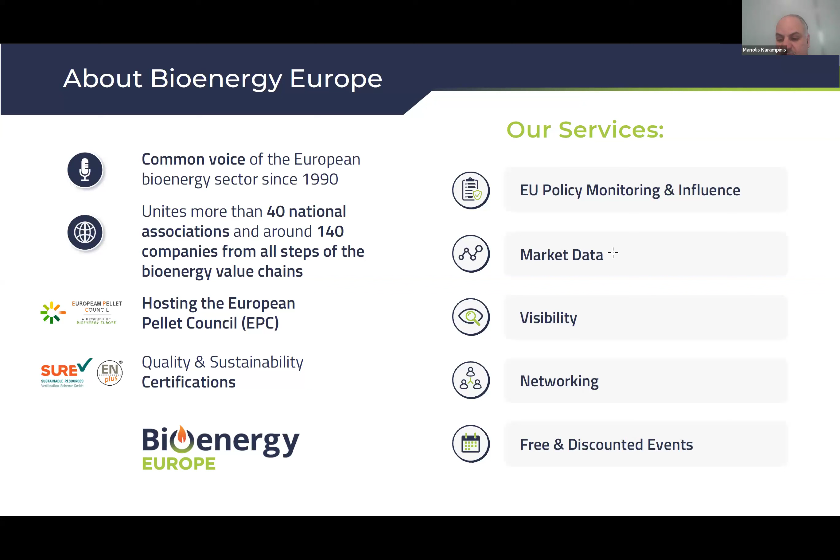And what we are doing is first and foremost EU policy monitoring and influence. We are active in collecting data from the market, but of course, like every association, to promote, make our members more visible and so forth. And what we are usually doing internally in Bioenergy Europe is organize activities within working groups. We have 7 of those. Some, I would say, are a bit more market-oriented or feedstock-oriented, like the pellets and agro-biomass.

Others are more policy-oriented, and the policy topics of priority at the moment are sustainability, the very hot topic of carbon dioxide removals. There is, I think, the 3rd webinar of WBA focusing on that, and also industrial competitiveness, which covers carbon taxes, Net Zero Industry Act, and many other policy files. If you would like to hear more about this, feel free to reach out to me later.

And when time comes, we are also involved sometimes in EU projects that allow us to expand a bit our horizons or knowledge of the sector. And we have been recently involved in 2 projects which are related to the topic of this webinar. RE4Industry, which was about renewable energy utilization in energy-intensive industries, and MUSIC, which was about thermally upgraded biomass feedstocks.

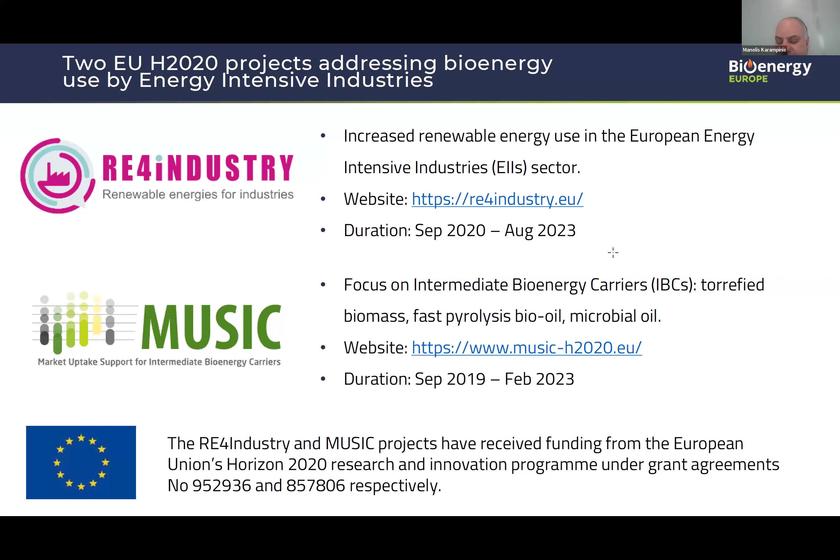I would invite you to look for more information on the project websites, because there is a lot of material over there. For today's presentation, I rely mostly on material we have developed within the RE4Industry project, so I still have to acknowledge it. About bioheat.

Focusing on the EU for the beginning, we know and we usually tell that bioenergy is the largest renewable energy source in Europe, and most of bioenergy is actually consumed in the form of heat. But of course, there is also presence in the electricity generation and the transport sector, but this is beside the point of today's presentation.

And if you look at the bioheat consumption in different sectors in Europe, the residential sector is about half of it. About 20% is derived heat, so district heating, but the industrial sector takes up already today 25% of bioheat consumption. So a big part of biomass is already being used in the industrial sector.

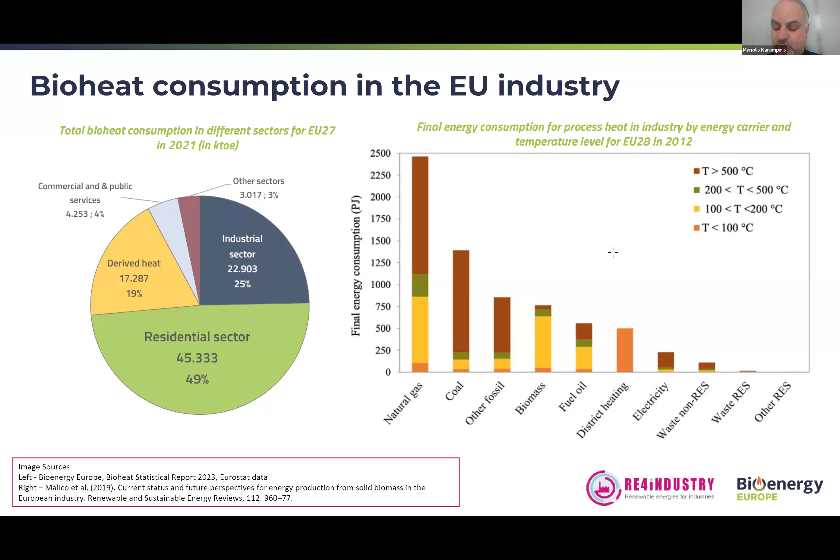When you look now at the temperature levels at which biomass is used and how it compares with other feedstocks, you will notice in the diagram on the right that biomass is mostly used for temperatures between 100 to 200 degrees in industrial applications. It has a presence in higher temperatures, above 200 or above 500 degrees even, but at the moment, not so much compared to natural gas or even coal or other fossil fuels. I would dare say there is a reason for that, and the reason has to do with which industries at the moment are actually using biomass more.

So if you look at how biomass is used within the industries, the ones that are typically using biomass to cover the energy demands are industries with biomass residues or wastes of their own. So the paper, pulp, and printing sector has, of course, their own residues, the wood processing sector the same, and the food sector is similar.

So if you take another approach of looking at the European industrial sector, you can differentiate between 2 segments. One industry segment with access to own biomass residues and wastes, and there, bioenergy already covers 25% of the total energy consumption. And you have another segment which is unrelated to biomass, dealing with minerals, with metals, where biomass at the moment only takes up 2% of their industrial consumption. But that might well change in the future, because that segment is also under pressure to decarbonize.

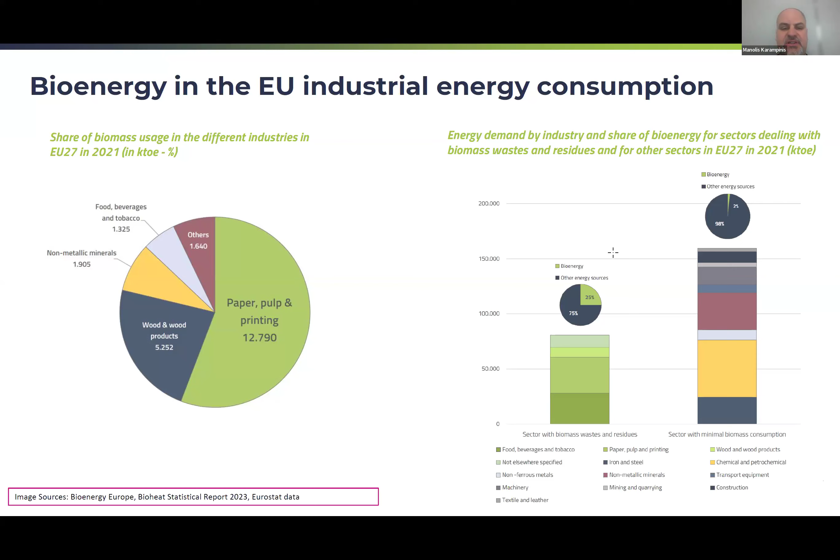For example, because of the calcination of limestone in a kiln. And the process emissions is a major issue, and the reason why I call these hard to abate industries, because you cannot control them by a simple fuel switch. You need other solutions, such as application of carbon capture and storage.

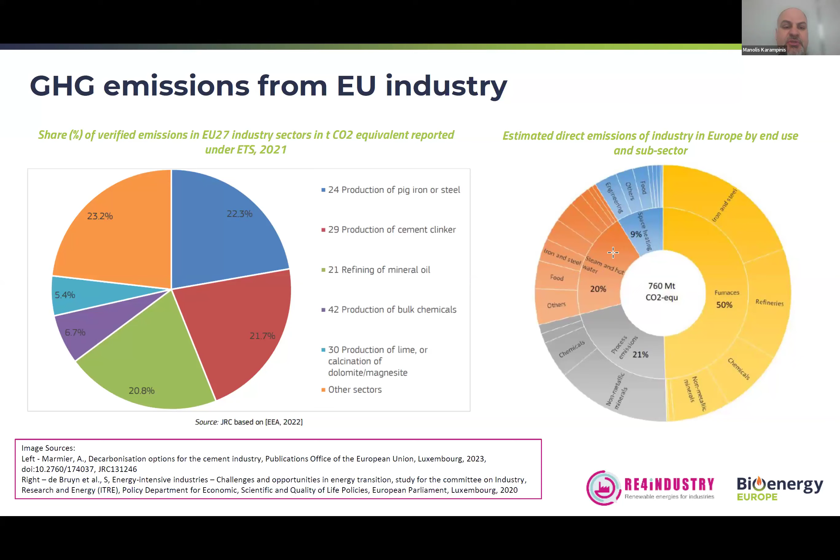That being said, the fuel switch is a major part of the energy transition for those industries. And today I would like to give you some examples of how some of them are looking into biomass utilization. And I will start with the usual suspect, which is the cement industry. Cement industry is a high temperature application. It requires significant energy consumption, around 3.7 gigajoules per ton of clinker produced, and it reaches temperatures about 1,500 degrees.

If you take note of the European cement production, which is 183 million tons in 2022, and multiply this by the energy demand, you can take a guess of how much energy you need for cement production. As noted before, 60 to 65% of the emissions in cement manufacturing are unavoidable process emissions, but the remaining is mostly fuel related. A small part is electricity driven.

So for the cement plant, switching to a carbon neutral fuel is a major step on the road to carbon neutrality. And already today, we have individual cement plants which go almost to 100% thermal substitution by alternative fuels. What is relevant to note is that these plants typically use low or negative value biomass feedstocks. So things like animal meal, sewage sludge, waste wood, green waste, and pretty much everything with a biogenic carbon content that someone wants to discard, and instead of ending up in the landfill, would go into a cement kiln.

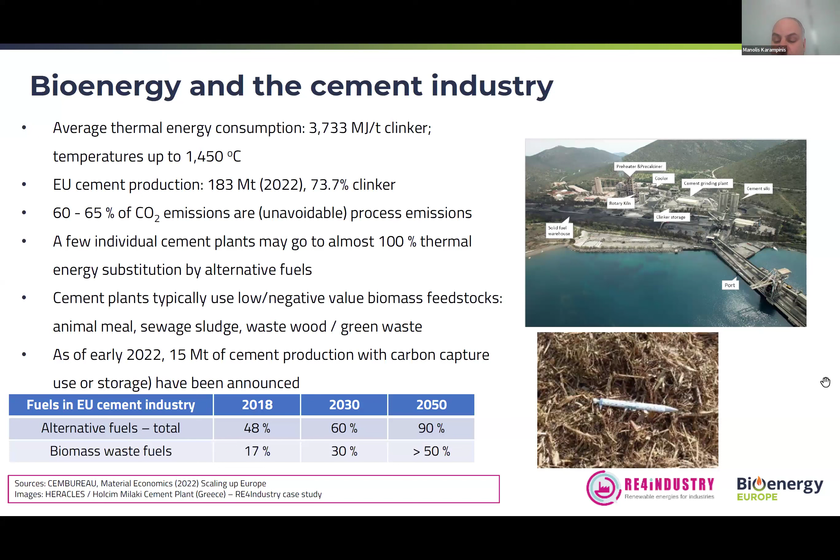If you look at the roadmap of the industry, by 2050, the European Cement Association estimates that 90% of the fuels used in the cement kilns in the EU are going to be alternative, of which more than 50% is going to be biomass. The pictures I have here are from a cement plant in my native country, in Greece, which is using already now and starting to use more and more green waste coming from public parks, from urban tree management, as a substitute for fossil coal.

A very interesting sector for the bioenergy world is lime. Lime has also high temperature levels, a bit higher energy consumption. If you look at the total EU lime production, it's not the same level as cement, of course, but it's a very relevant material used in many different applications. Noticeably different between lime and cement is the size of the industry. In cement, we're talking about fairly big plants. In the lime sector, we have multiple smaller lime kilns in almost all EU countries, and most of them, I would say, are small-sized companies with some exceptions. This has some implications when it comes to considering, for example, bioenergy supply chains.

Again, we have the unavoidable process emission component, which requires that the lime industry employs CCS solutions in the long run, but the fuel switch is already part of their strategy. In September or October last year, the European Lime Association published a pathway to a negative emission sector by 2050. Fuel switching is mentioned. And if you look at the graphs, biomass is already expected to be 1/3 of the fuel mixture in the lime kilns in Europe by 2030, and it will retain this percentage all the way to 2050.

So in total, we estimate that perhaps the biomass demand that could come from the lime industry is around 2 million tons, and already now there are lime kilns even at 100%, but usually these are located in the southern European countries, smaller and using locally available biomass resources.

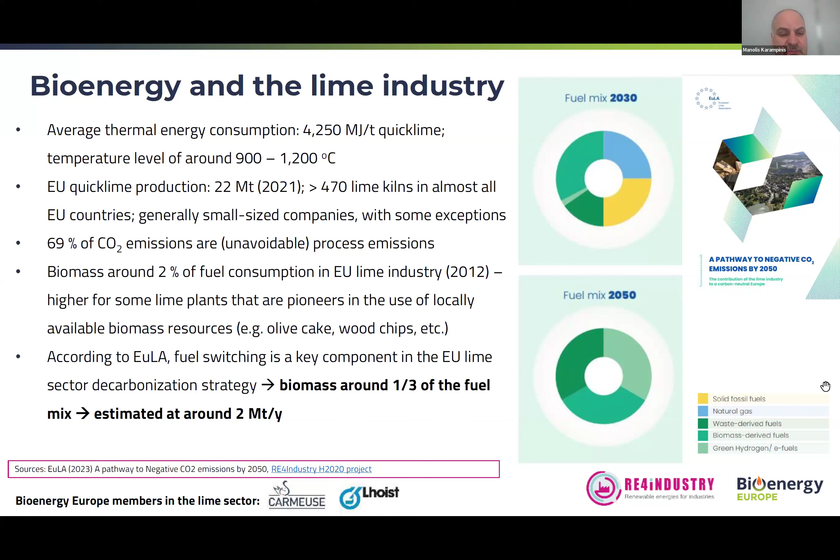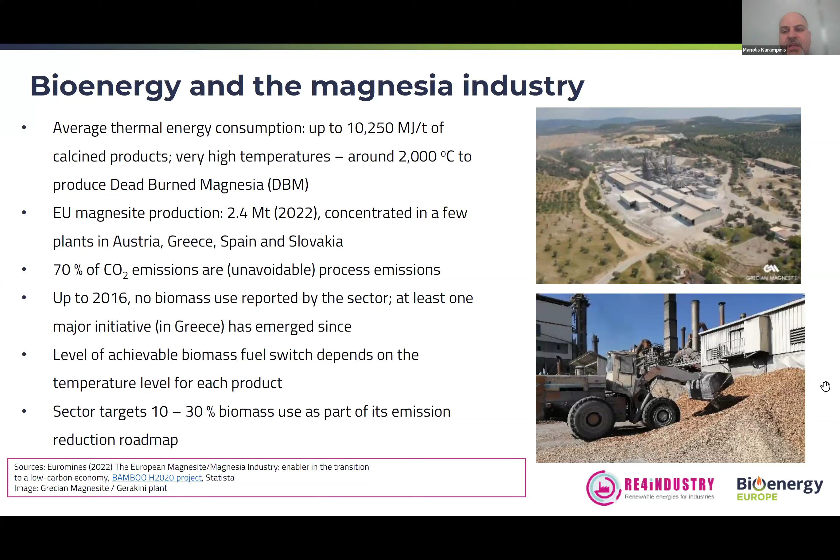In any case, the sector as a whole targets 10 to 30% biomass use as part of its emission reduction roadmap for the future. Steel is another very interesting case, but already here we're steering away from the pure temperature applications and more into metallurgy and chemistry.

The steel sector is using fossil carbon as a reductant, about 58 million tons estimated in 2021 in Europe, and secondary, I would say, as a heat source. The steel industry has two main production pathways: the blast furnace, the more traditional one and a more polluting one, and the direct iron reduction with lower demand for fossil carbon.

The long game, I would say, in the European steel industry seems to be a switch from blast furnaces to DRI production methods. But until we get there, there are going to be blast furnaces in operation for sure, and we are already looking into projects that aim to substitute fossil carbon by thermally processed biomass. The principle works. We know that it takes place, for example, in smaller furnaces in Brazil, where charcoal is replacing coke even up to 100%. But this is easier to do due to mechanical properties.

In the bigger blast furnaces of Europe, at the moment, we are talking more about biochar or torrefied biomass, which is substituting what we call the pulverized coal injection. Not going into all the technical details, by 2050, we could have a demand of 10 to 17 million tons of biocoal, which goes to an impressive 60 to 90 million tons of biomass. And it's also relevant to note that we have other metallurgical industries, for example, manganese alloys, which are also looking into thermally processed biomass fractions as a replacement of fossil carbon in their own processes.

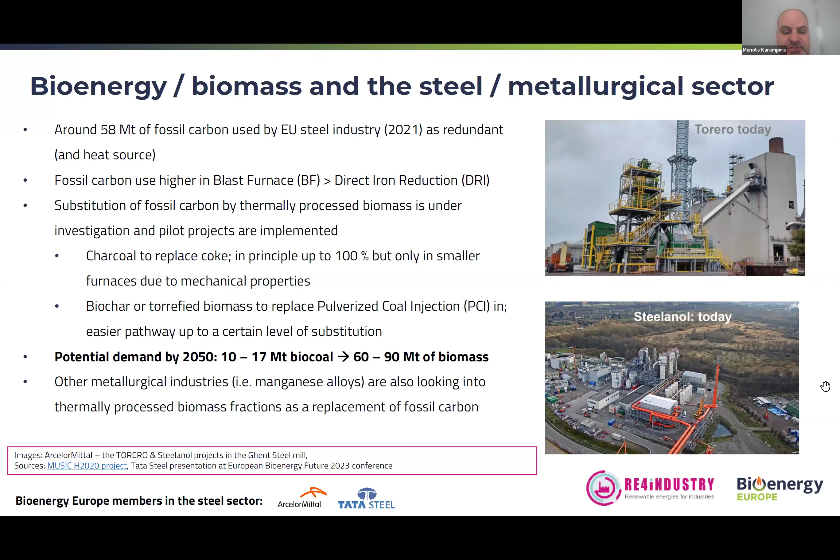A few words about the chemical industry. There are two ways in which biomass could be used there. Perhaps this will be discussed later on. One is the standard method of producing steam from biomass. This is a well-known and proven technology. Whenever you have steam demand, you can do it with biomass. So I would say this is a low-hanging fruit and already taking place. We have examples of soda ash production using biomass instead of coal.

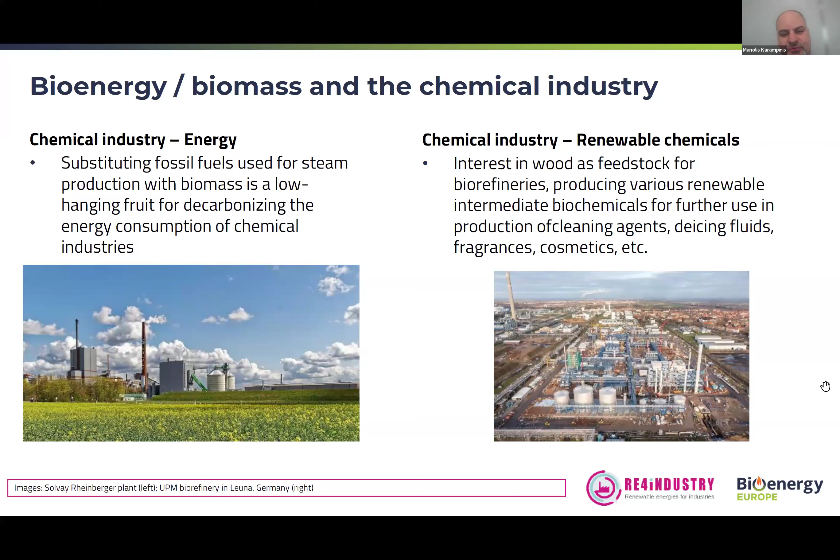But the other pathway is a bit more elaborate, which is using biomass as a feedstock for carbon. And there you can have different types of intermediate products like cleaning agents, de-icing fluid, and so forth, but it's a bit more complex pathway.

Not taking up too much time, some outlook. I didn't discuss scenarios in this presentation, but I would say most of them agree that biomass and bioenergy would have an increasing role in the global, even the European, energy demand in the future, with an increasing emphasis in hard-to-abate sectors, which includes industrial heat. I should emphasize that biomass and bioenergy is usually not the only option for the defossilization of the industrial heat demand, but other energy carriers, other solutions like green hydrogen, electrification, and CCS or CCU are also expected to play a role.

Bioenergy is well established in the wood and the food processing sector, so the sectors that already have access to biomass resources. It is currently used in small volumes in other sectors, but I would dare say it leads the race in maturity and cost effectiveness because it is already there, it exists, and it can work cheaper than other solutions at the moment. In the long run, it will be employed in applications where it provides a competitive advantage over the other solutions for the industries, because at the end of the day, industries also want to make money.

And when it comes to the prospects for industrial bioheat, I would say they depend on several parameters. One, for example, is the market development. You have to consider the price of fossil fuels and the EU ETS price, so the carbon prices compared to biomass. But you also have to consider the specificities of each industrial site, things from space limitations, access to local biomass resources, access to logistics infrastructures, and sourcing options.

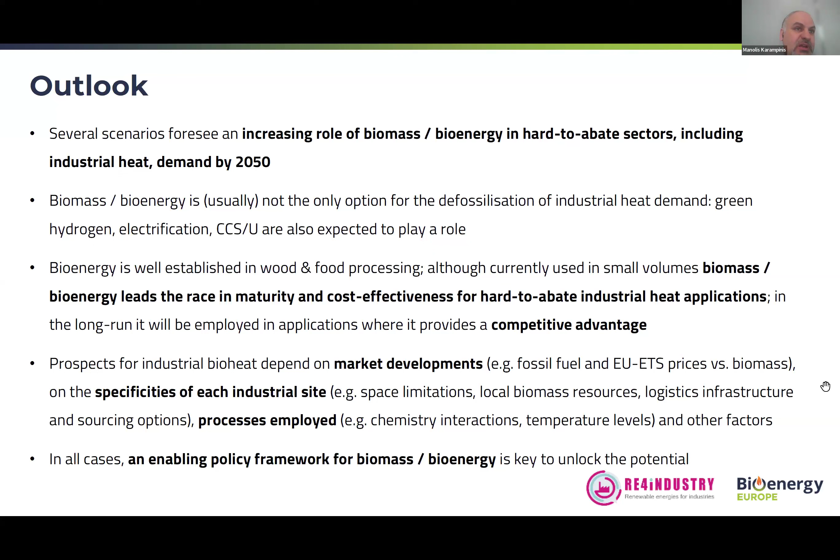And of course, you have to consider the process that you employ in your industrial process, whether you need simple steam or whether you need something more elaborate that requires that you pre-process your biomass to a certain quality or characteristics level. And in all cases, and this is the role of Bioenergy Europe at the end of the day, you do need an enabling policy framework for biomass and bioenergy to unlock its potential. You need clear rules on biomass sustainability, but also on how you can use it in an industrial setting.

Okay, you see that okay? No, we now see the view of the speaker. So we see your view, but not the presentation mode. No problem, I will swap that over. There you go. That's fine.

Okay. Thanks, Christian, and thanks, Manolis, for a great introduction there and a good overview of some of the sectors where we are certainly seeing demand for biomass that we produce in the form of wood pellets. So my name is Justin Tait. I'm our Director for Responsible Sourcing at Enviva. And as was already said, Enviva is the largest producer of wood pellets globally.

Part of my role is to work with our market development team and to support them and work with customers and potential customers and markets on understanding what we do as a business in terms of sustainable responsible sourcing. But that also means I get involved in discussions with some of these new use cases, and hence why I'm here today. My colleague Jens Wolford is also very heavily involved in this area, but he's in Copenhagen this week, so I'm going to take us through this presentation. So just give me a second.

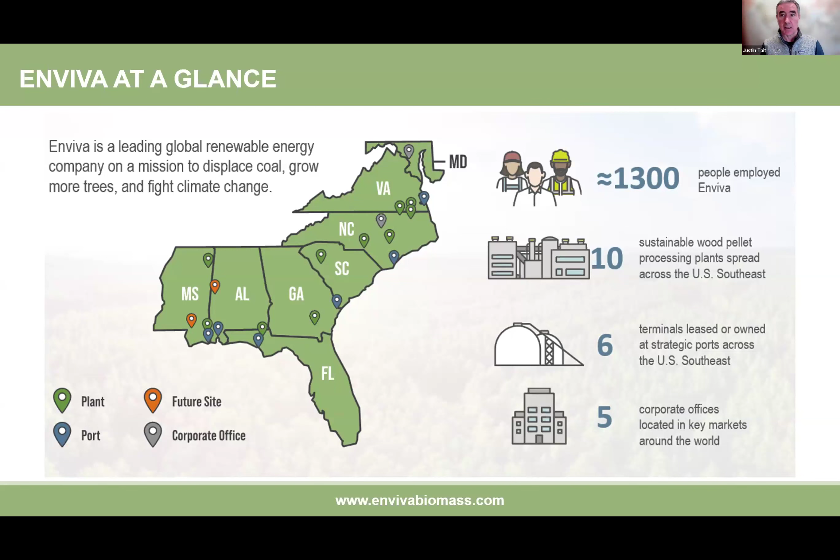Okay, so Enviva, as I say, is a producer of wood pellets. We have 10 production plants in the Southeast US, shipping out of 6 terminals, predominantly into Europe, the UK, and Japan for our customer base. So Manolis is focused as Bioenergy Europe in Europe, but we as a business are much more globally focused. We have a nameplate capacity to produce around 6.8 million tons of woody biomass in the form of wood pellets. We have offices in the US, but also here in the UK, and in Berlin and in Tokyo.

I probably don't need to say this, but I think we all know that the IPCC and the IEA and many others recognize bioenergy and biomass within that as key to cutting emissions, reducing our reliance on fossil fuels, and addressing some of the harder to abate sectors, including with BECCS, which is clearly a focus for some of the traditional power generators right now: how they develop bioenergy with carbon capture and storage.

This is what we're talking about, the humble little wood pellet here on the left-hand side. Manolis has already touched on some of these sectors on the right-hand side where we see future uses for biomass, and we'll cover a few of those where we're already involved in a moment. But you can see the characteristics of a wood pellet make it suitable for quite a big range of potential applications, given the right technologies, logistics, and support mechanisms. And some of those can be a challenge for actually taking some of these potential uses to realization, and I'll touch on some of those as we go through.

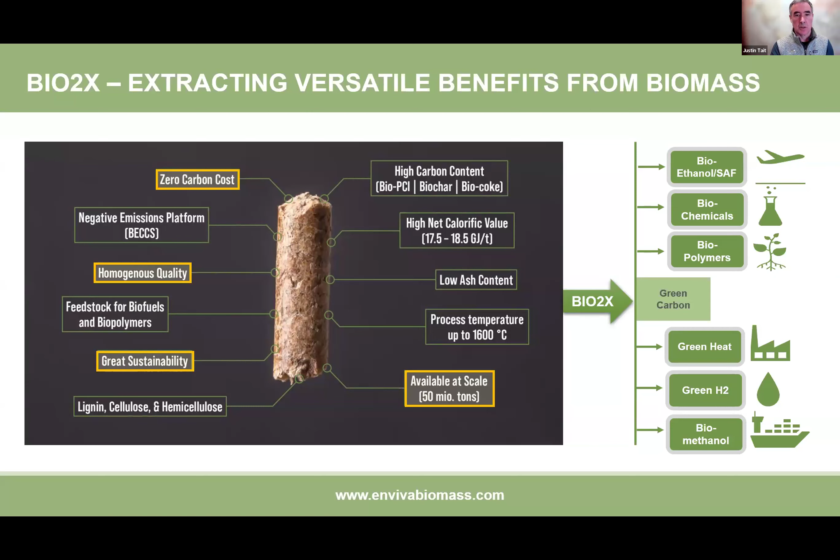So I think Christian said at the beginning that what we get from bioenergy and biomass is the ability to produce heat or power as a renewable fuel, even when there isn't sufficient sunshine or wind for solar and wind power. I mentioned at the beginning, we traditionally focused on replacing coal, so that's really in power stations for power generation and heat and CHPs, where we know there's a proven case to use biomass and an ability to reduce GHG emissions significantly, 85% compared to coal, 70% compared to gas.

Most of our existing customer base has gone through that journey, either converting an existing power station, which is a fairly efficient thing to do, or in the case of Japan, where they've invested heavily in building new plants to replace nuclear power and making bioenergy and the use of biomass a significant part of their portfolio. So as we move across this graphic to the right-hand side is where we see the discussion and the potential for harder to abate industries that Manolis was talking about, to reduce the reliance on fossil fuel within those value chains, and for woody biomass to become a serious part of a wider bioeconomy.

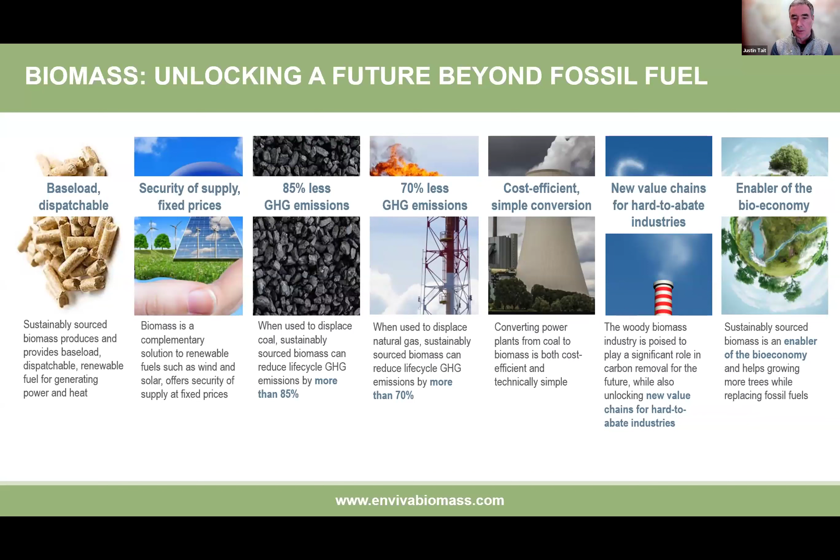And some of those areas where we have had conversations with potential off-takers for biomass feedstock include the process heat, certainly for lime and cement, and Manolis mentioned a couple of those examples. We have existing contracts and supplies into Europe for some of those applications that began last year.

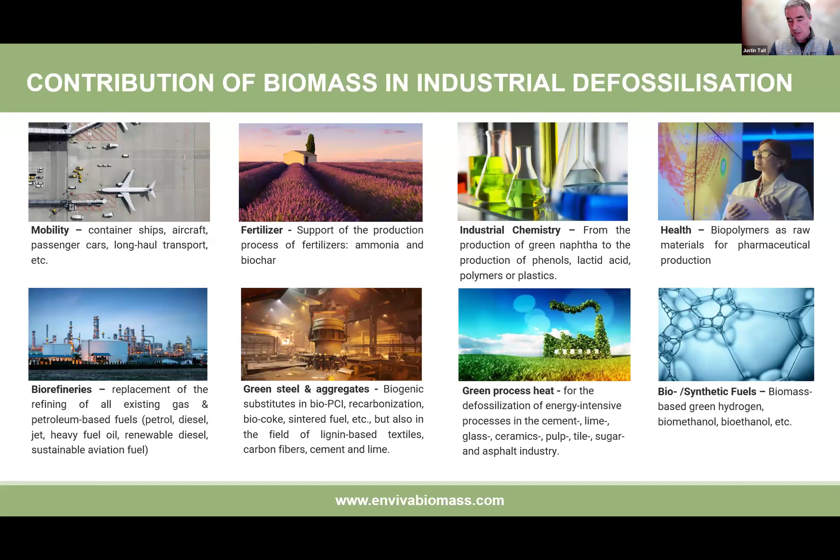We have lots of conversations around the steel space, some challenges there, technology challenges about getting the right kind of heat out of the pellet, and whether torrefaction is a route to do that. But there's also lots of other industry and chemical applications, and we'll come on to some of those for refining into green crude and green crude into things like SAF and to marine fuel.

I think the closest term ones that we're working on and we already supply into and have set up contracts with are lime producers. And I think those are good and working, but I think there are some challenges around logistics. If we think about our traditional logistics, they're huge, they're big volumes into ports, into a single site power station. And once you have that infrastructure set up, it works, it's fairly easy to manage.

I think with some of these newer applications, particularly lime, we have smaller plants, more plants spread out across a greater geography. So the logistics for wood pellets need to be established as getting smaller volumes into smaller plants and smaller uses. So that creates some challenges for us, but definitely doable and something that we already do.

Steel, I think, again, transportation does become an issue there, but also it's thinking about what's the material use. Does it need to be torrefied? How do we do that at scale? We don't do that ourselves at the moment. Lots of people have asked, are we thinking about doing that? But the answer is right now we're focused on what we produce right now, which is a white wood pellet. But there's plenty of opportunity there, I think.

A really interesting one, of course, is the SAF space. Lots of potential feedstocks and feedstocks already in use for SAF, but woody biomass is one that we have had many conversations about and signed initial offtakes for. We don't have supply chains operating right now into that space, but agreements to do so if the refining capacities are built. It's potentially a massive market.

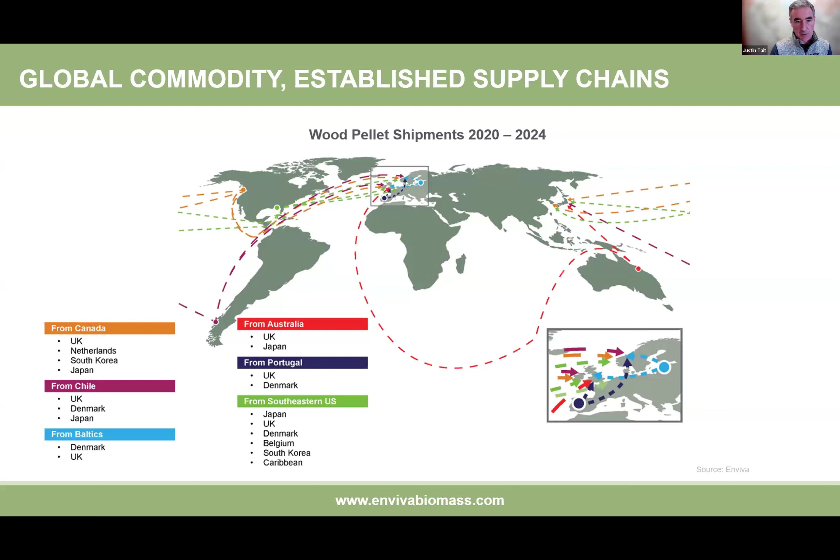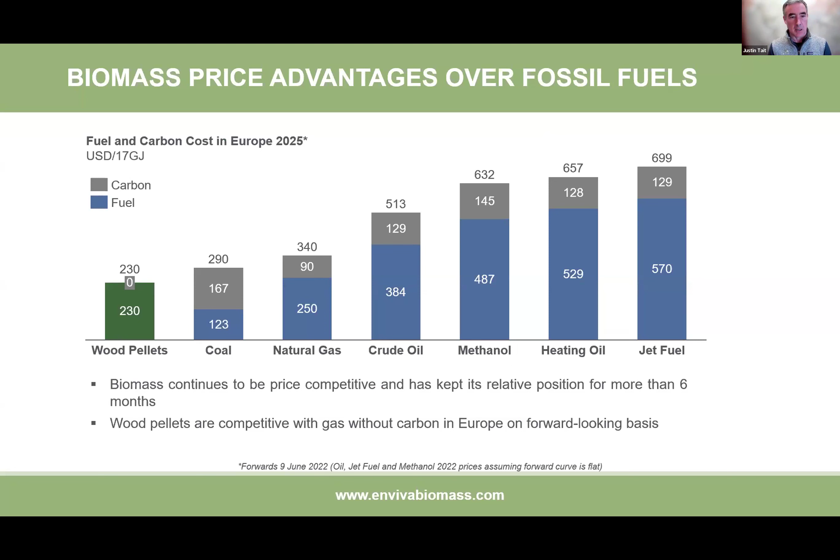The only other slide I had in here, we haven't really touched on pricing, but we did some work last year to think about the competitiveness of wood pellets specifically versus other fossil fuels when you take into account carbon pricing and projections on carbon pricing. Of course, for those customers in the lime industry or cement or steel, that's exactly what they're doing. They're thinking about where their costs are going to be related to carbon, and fossil fuel prices are an important part of the equation for the case to move to a bioenergy or biomass source. And the carbon element of that is clearly very important. So, any questions?

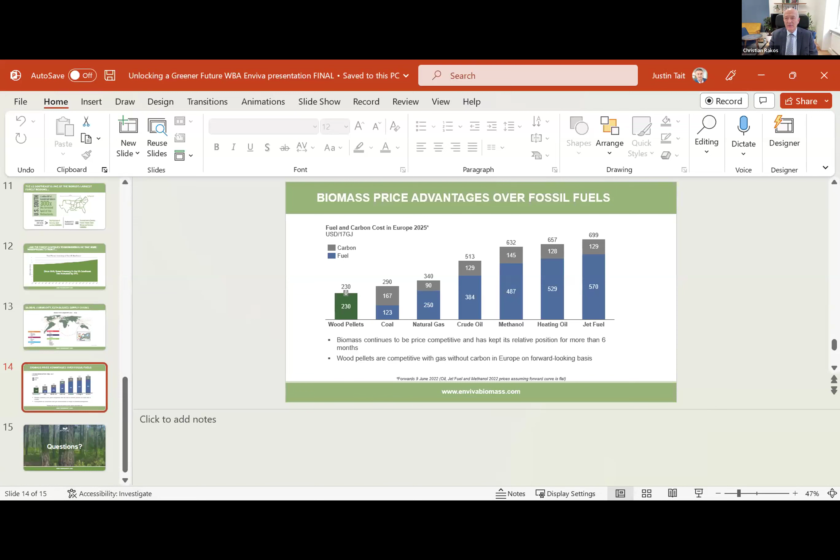Thanks a lot. I think we'll collect the presentations and have the questions at the end. So I would like to ask Thomas Schmidt now to share his views. Thomas has been very much into using biomass in smaller scale industries than you have been talking about, Justin. So Thomas, give us your experiences with renewable process heat using biomass, please.

Yeah, thank you, Christian, and warm greetings from Bavaria in the southern part of Germany. I want to show you some of our projects in smaller scale businesses, businesses not used to using biomass. Our typical customer is producing, for example, gummy bears or stuff like that, and not wood panels or paper. So the projects we are doing are normally with customers far away from knowing how to do that and how to deal with biomass.

We started 15 years ago with smaller projects where we made steam from pellets. That was the smaller systems up to 3.5 megawatts in that container systems. We call it Klimaschutzzentrale, and we have some more projects of that.

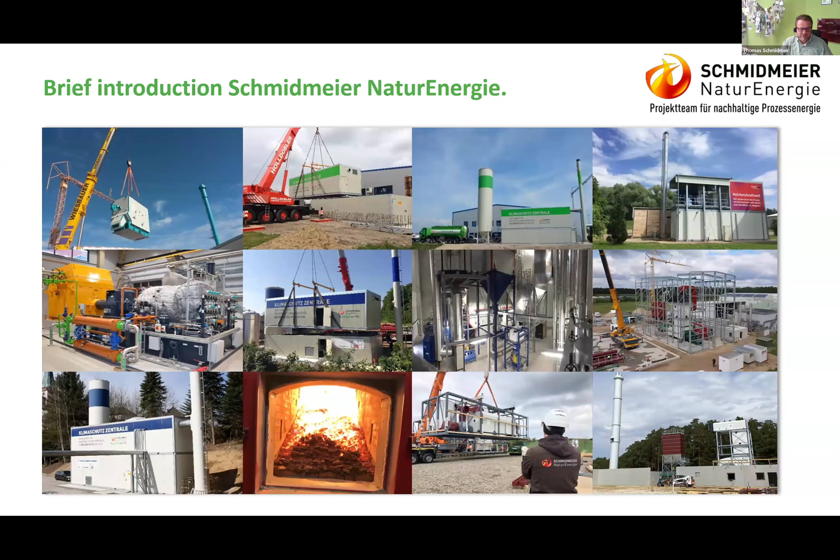But what we've learned in the past is the projects are getting bigger and bigger, and a 2,000 kilowatt project was typical 10 years ago. Today it is a very small project for us. We work between, let's say, 500 and 25,000 kilowatts.

We are doing a lot of CHP projects in Germany. We never produce electricity from wood in our projects for bringing it into the grid. Our customers are using whatever they are producing in their plants directly.

We are doing it in a special way because we're no boiler producer. We are a little bit untypical, something between project finders, sellers, engineers, project engineers, and we build it up.

We have our own staff to weld all the pipes and stuff like that, and then we help the customers with wood supply, with ash deposit and stuff like that. And we always say we are getting friends for lifetime with our customers.

In Germany, we have the situation that the government knows that biomass has to go a little bit away from that low temperature heating in grids, in smaller villages. What we can do in some years when we have enough electric power with electric power, and we can store warm water for a long time for district heating.

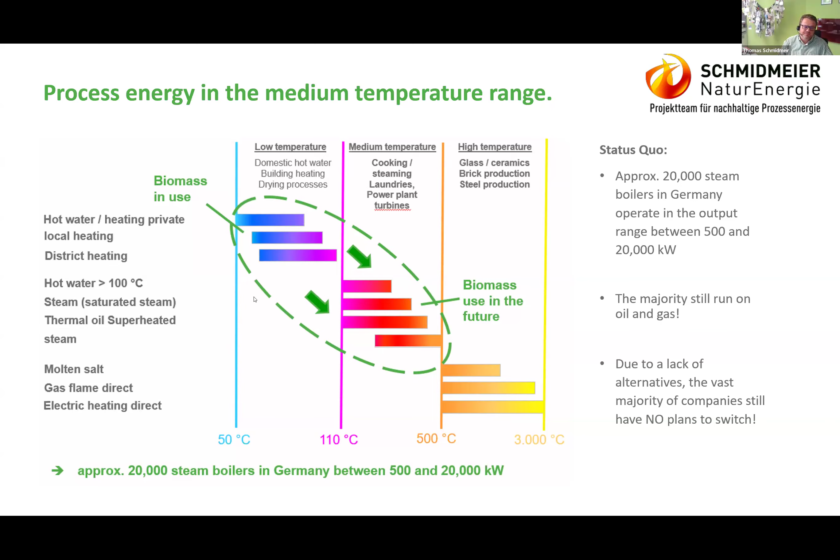Our fuels, as I told you before, 10 years before, it was pellets most of the time. And then we changed to residues, to cheap stuff, to material which has high ash contents, problems with ash melting points, and so on. And this is what helps us today, because the political landscape in Germany has changed completely.

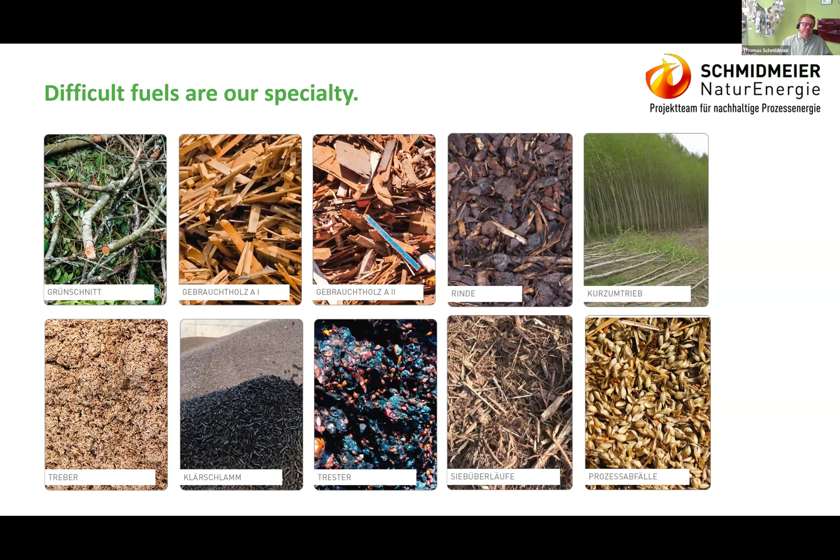And in Berlin, all the politicians are thinking that we have no wood, absolutely no wood, and we need all the other stuff to burn. That's not correct, but this is what they think in Berlin, and this is what helps us in our projects. And with subsidies in Germany, they are only willing to finance projects where you are working with used wood, with residues, and that helps us because this is what we are doing 90% of our time.

We have different systems to burn wood. You can see this ACF, ACR, ACRP, that is the air-cooled stuff, where we just have a cooled grate, no firebox cooling, and this is the difference to LCR, LCF.

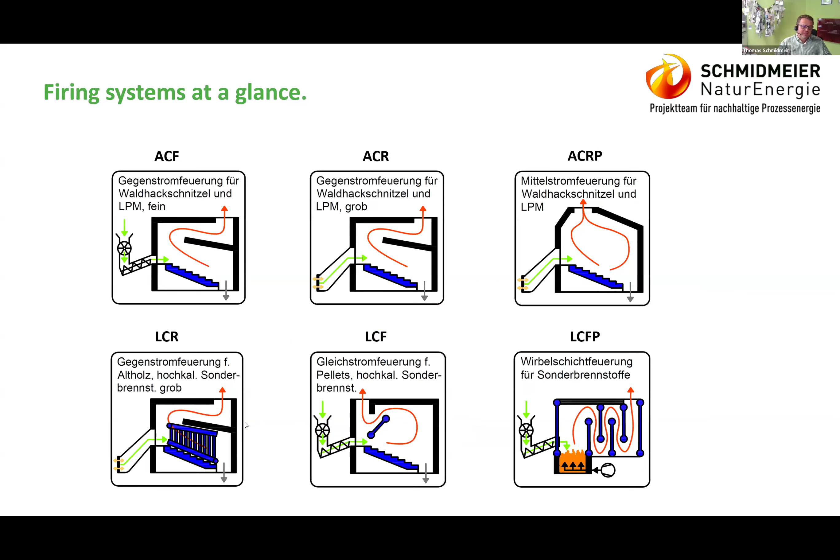These are the systems where we have a cooled firebox, which helps us to avoid melting ash and all the problems you can see in boilers which are using high caloric fuel. This is what we are doing every day, to cool the fireboxes to avoid ash problems, ash melting problems.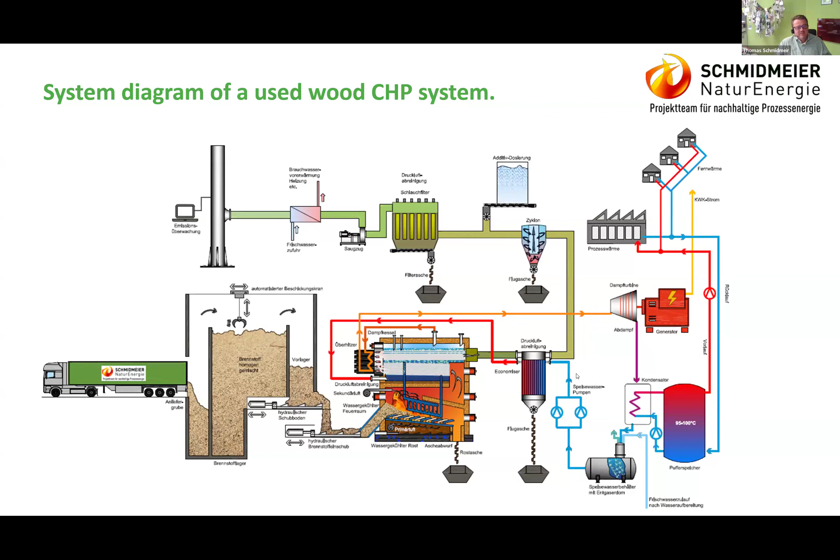This is a typical project with a small steam turbine, and we are using here the warm water to provide a plant. In different projects, we are using the steam in front of the turbine, or we are using the steam in the middle of the turbine to produce something, and the rest goes into energy production.

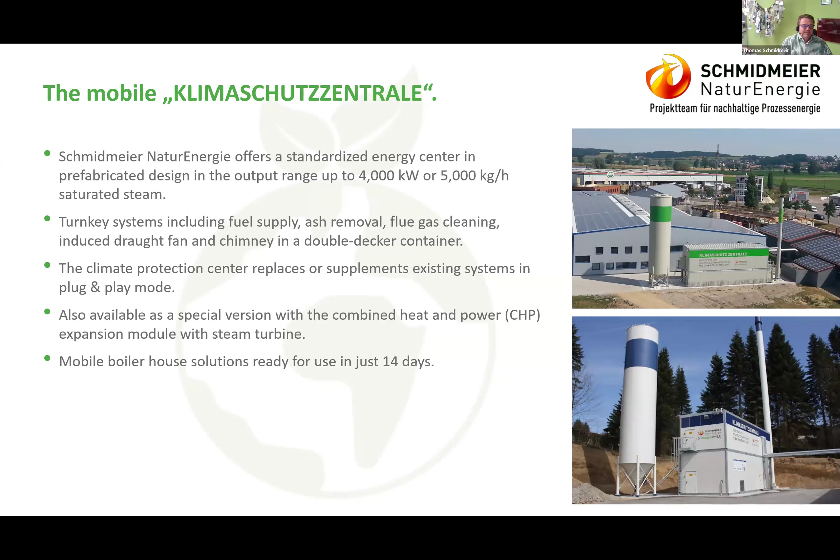These are the first years' projects with pellet silos and systems up to 5 tons of steam. This is the maximum what you can transport on German highways. 3.9 megawatt furnace capacity, 4.5 up to 5 tons of steam. This is the maximum. And when we have bigger projects, we change to special constructions.

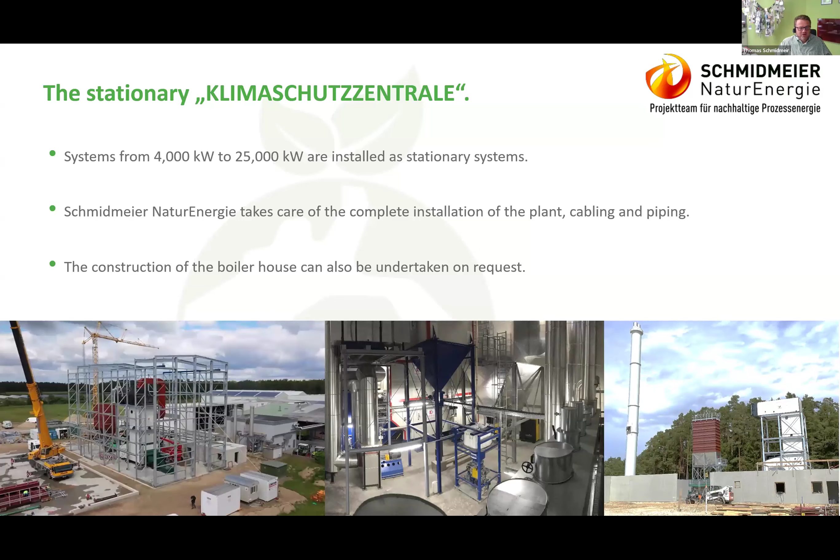We deliver that complete. So we need no other companies to work in the same place, and this is what our customers want. One phase, and somebody who solves all the problems in a project.

I have some projects now and some lessons learned after that for you. This is the newest one, a very big pharma producer with a brand new plant in Bavaria. They invest up to 500 million euros in making that plant bigger, and we supply a steam boiler with 6.4 megawatt firing capacity, 12 bars, and it runs nearly full power the whole year.

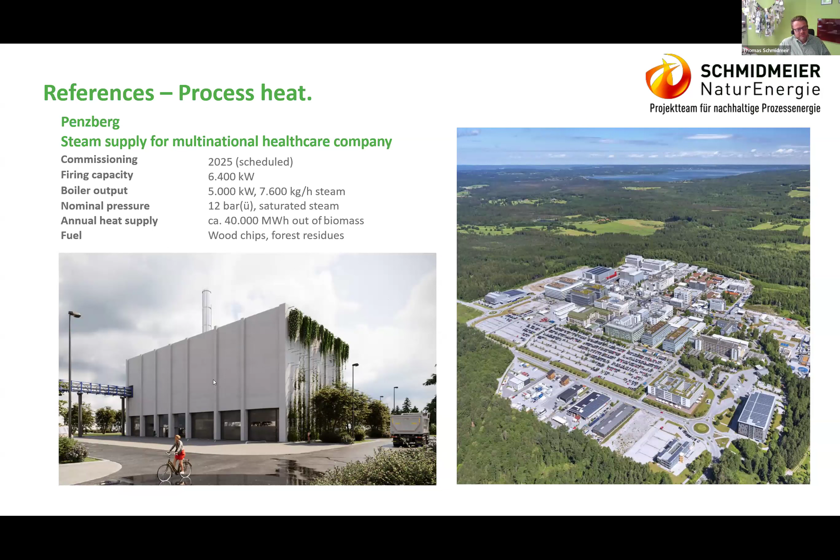They will supply 40,000 megawatt hours per year, and this is not a typical project for us because they are using wood chips and only wood chips from forest residues, no used wood, nothing more than material from forests, which is untypical. And we are doing that as a main contractor. We supply the building, everything complete with the boiler, and we help them to run it. And we founded a company to supply them with 70,000 cubic meters of wood chips per year for the next 10 years.

This is the biggest vegetable dryer in Germany. Steinicke is the company's name. We installed a 9.3 megawatt boiler last year. We make 25 bar there, which is a very high level for us, but it is prepared for using a turbine later. This system was built in a time where the subsidies in Germany did not allow steam turbines in that project. So we prepared it, and in some years that customer will install a turbine and will produce energy for his plant too, not only heat.

And it's 100% used wood class A1 and A2, which is not the very poor quality. It is with paint, with plastics on it. That is no problem, but no quicksilver and not the very poor stuff.

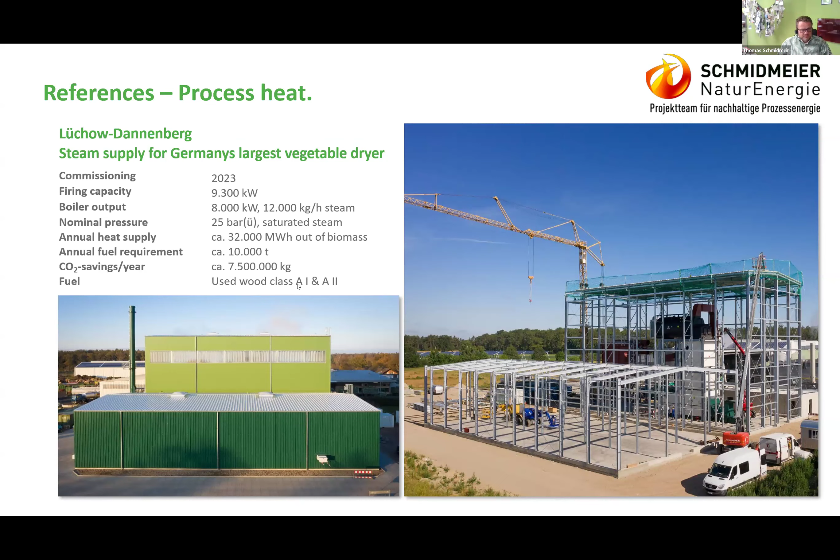This is a greenhouse project, 15 hectares of greenhouses in Bavaria, where we supplied 2 boilers. The first is installed and is running. It's a 6.8 megawatt warm water boiler. All our boilers are from Kohlbach. And now we install a second one for superheated steam together with a turbine. Now it is allowed.

And we use the steam to run a turbine. And then we go with warm water after the turbine into the greenhouses. And they are using used wood and forest residues together. Both is permitted there, and we can do both in that plant.

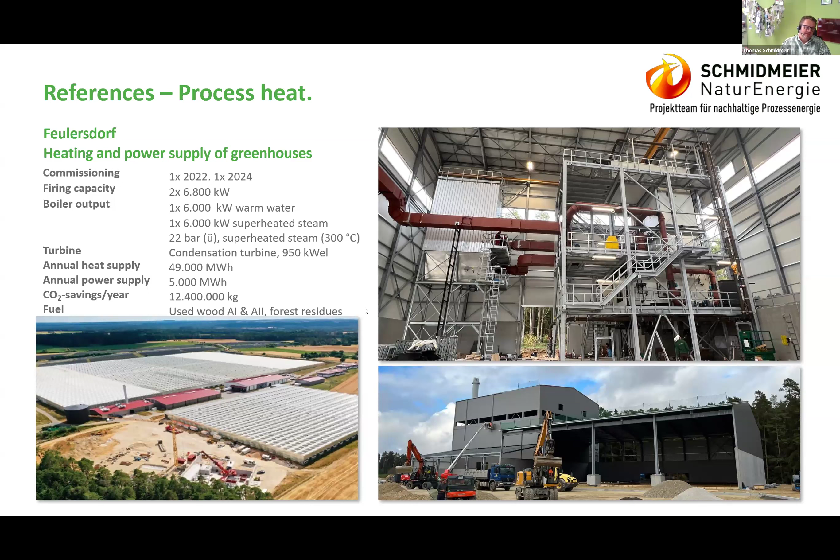This is a new project. It's in commissioning this week and next week, it's ready now, but we have no better pictures than this one here. Fire capacity is 10.4 megawatts. It's built for used wood class A1 and A2.

They will save 11.3 million of CO2 per year with that plant, and it's the world's biggest producer of, I don't know the English word, whatever a brewery has as a residue after having made the beer. This is used here to make very high level food for pets and so on.

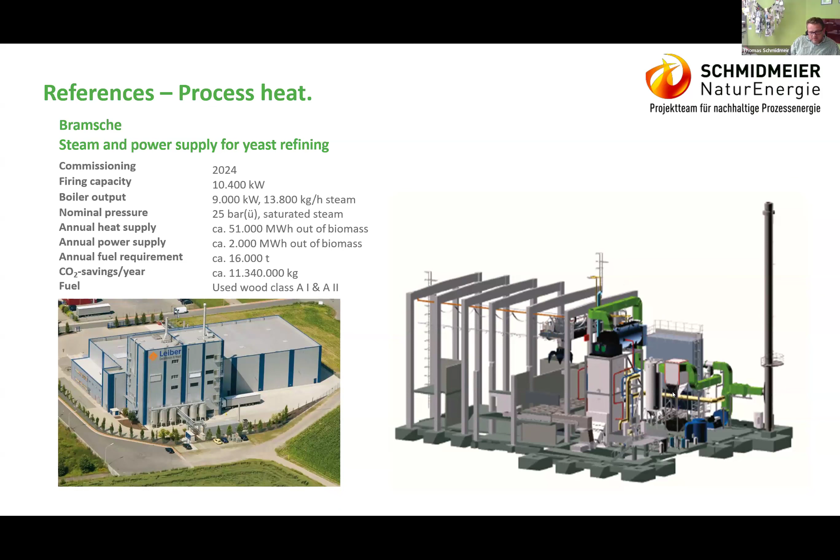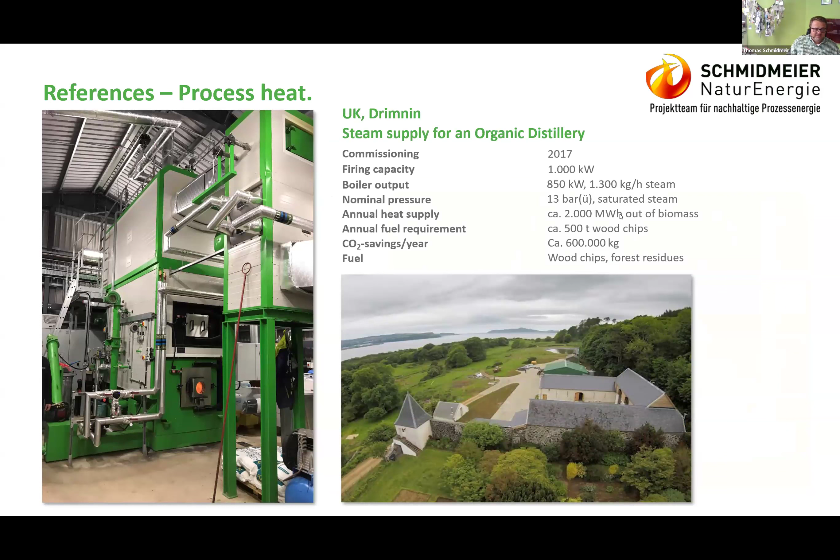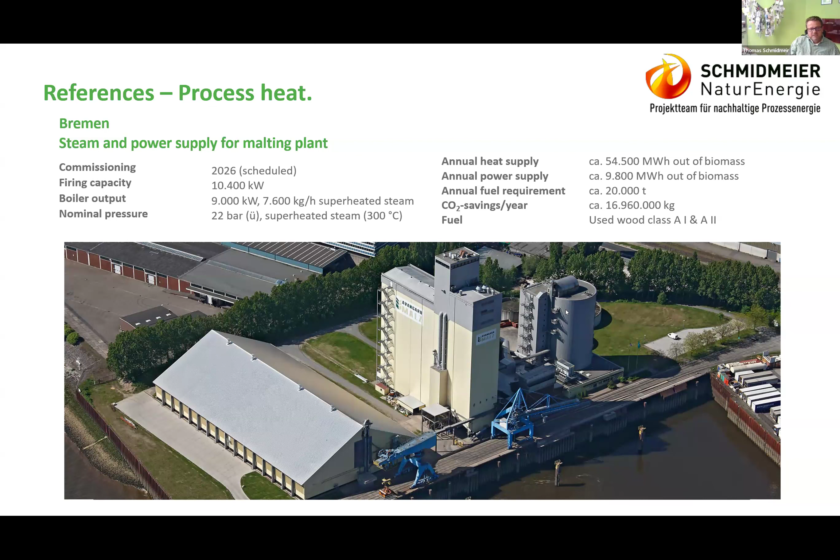That is a new project for a Russian company, Europe's biggest malt producer with 4 plants in Germany. And we start here in Bremen to build a 10.4 megawatt boiler for them with superheated steam, 22 bar, 300 degrees. And we will make their steam for the process and energy for the process too. And they are using just used wood class A1 and A2.

That is one of our oldest projects, installed 2014, 100% industrial wood pellets, 2.5 megawatts. It's installed and has run since that time without any problems, without anything we had to do there, and very successful for the customers. They won a lot of prizes Europe-wide for that laundry.

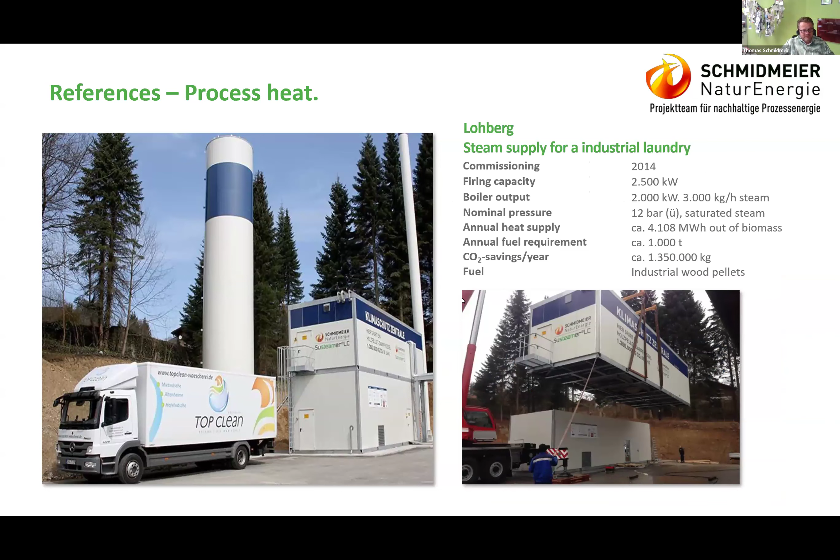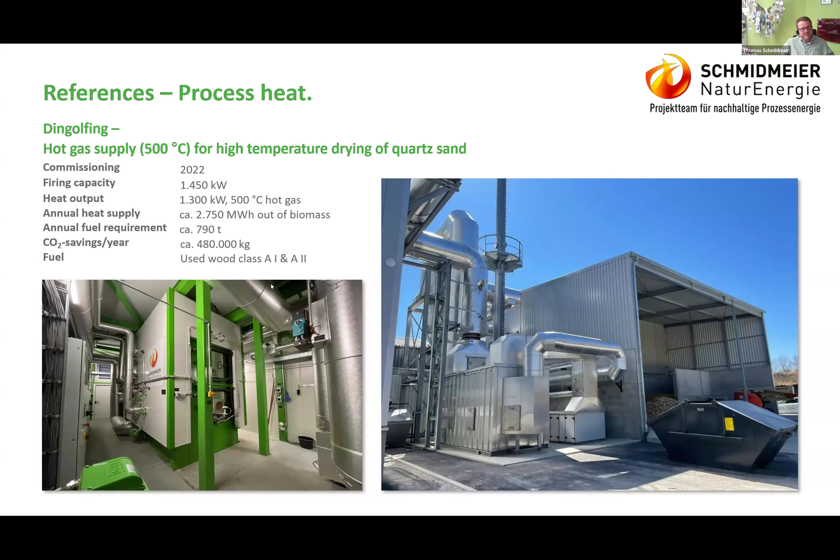This is an interesting project because we are producing more than 500 degrees there to dry quartz sand for different industries. We have a second order now for a much bigger plant, nearly 10 times bigger. They are drying 1 million tons of sand per year there for making metal stuff for motors, and the sand is sent out to nearly the whole world, whole Europe minimum. And both projects are using used wood class A1 and A2 too.

And I think this is one of the last projects. This is in Nuremberg, where we supply glass houses too for a farmer, and we supply the whole Nuremberg airport. You can see it on the picture behind. That is supplied completely with heat in the winter time to heat up the buildings from those two systems, it's 2 times 5 megawatts.

And Christian Rakosch asked me for something like lessons learned. The lesson we learned in the last few years was the projects are getting bigger and bigger. That means you have to handle more money, more value, which is not too easy for a family-owned business. We are 70 people. And I learned in my life the most important thing when you are growing fast and dealing with big projects: no bankers' money, no investors' money, just your own stuff. That is the most important thing for us, and we are very proud to be able to do that in that way.

The customers are getting bigger and more professional. So you can do a handshake for 10 million euros with a vegetable farmer, like this one in Nuremberg, but you can't do that with a pharma company working worldwide. And we are dealing sometimes 10 months for a contract to be ready and to sign it, which is a huge problem for a small company. We hired lawyers now, and that needs a lot of time from us to negotiate all those contracts.

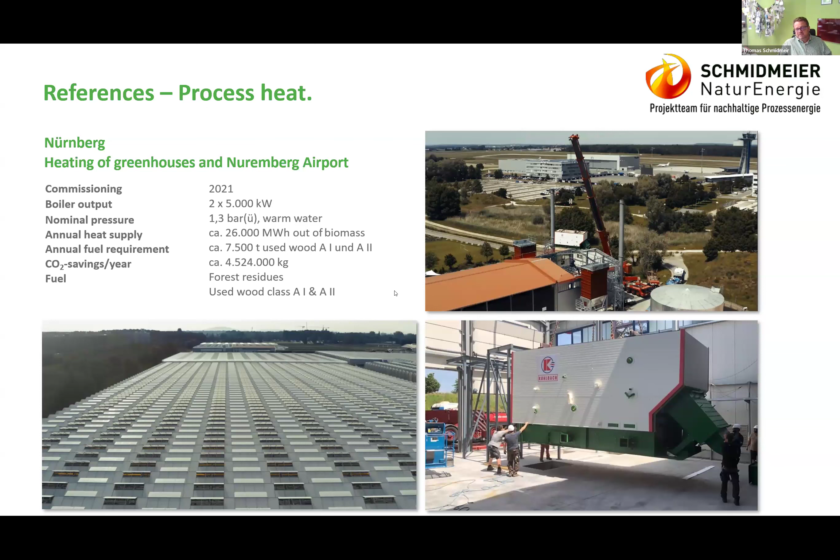And I think the most important thing we learned during the last 2 years was that biomass is more and more seen as a limited source in Germany. There are a lot of climate protectors who are fighting against us, and this is where all the people we have in that call and in that session have to stand together and fight against them, and make sure that we can use biomass as carbon-free fuel in 10 years in Europe again. That's it. Thank you very much.

Thank you very much, Thomas. So a wide range of different projects that you have realized. It's interesting that you're noting that you have actually parted from taking high value wood towards used wood or other residue materials. I have been trying to follow up the chat. There is a lot of discussion going on in the chat, and a recurring question has also been on the use of agricultural residues. Do you have specific experiences with agricultural residues, and can you comment why most of your projects are based on wood?

Yes, most of the projects are based on wood because we have no ash melting problems. We have no problems with too much silicates in the stuff, and we have seen that things like straw are not cheaper. They are more expensive than wood, and all that used wood stuff. In Germany, we have a price for used wood today of, I think, 35 up to 40 euros per ton, which is less than 10 euros per megawatt hour. We are telling our customers, don't deal with agriculture projects when you can find wood for 50 or 60 or 70 euros.

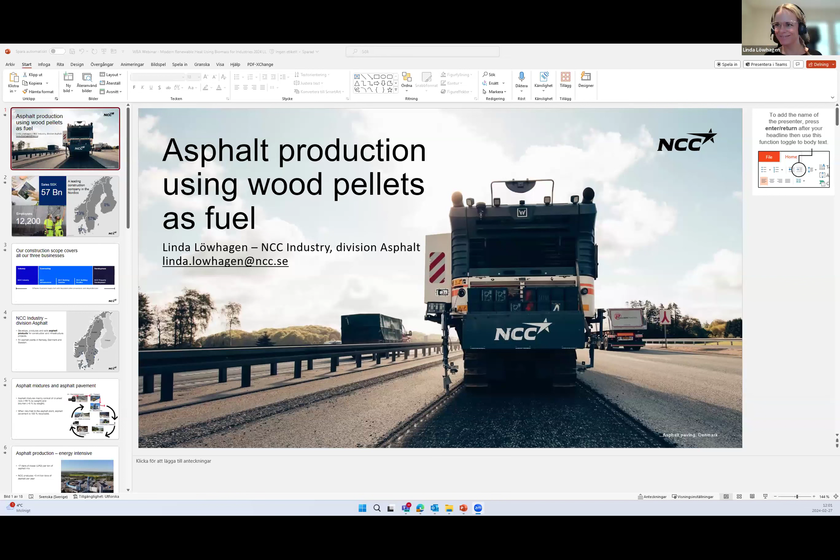Let me see. So, can you see my screen? Absolutely. It's still not in presentation mode. Okay. Put it in presentation mode. Is it good? Yes, thank you. Great.

So, okay. My name is Linda Löwhagen, and I work as environmental manager at NCC Industry Division Asphalt. And as already said, today I'm going to talk to you about asphalt production using wood pellets as fuel. So this picture might be a little bit misleading since we don't use wood pellets in our paving industry, but we do it in our asphalt plants. But I have so many pictures of asphalt plants that you will see during this presentation, so I started with this one instead.

So we are a construction company and we are based in the Nordic countries, and we are divided into 5 different business areas. These are NCC Industry, NCC Infrastructure, NCC Building Sweden, NCC Building Nordics, and NCC Property Development. And the business area NCC Industry is divided into 2 divisions, Division Stone Material and Division Asphalt.

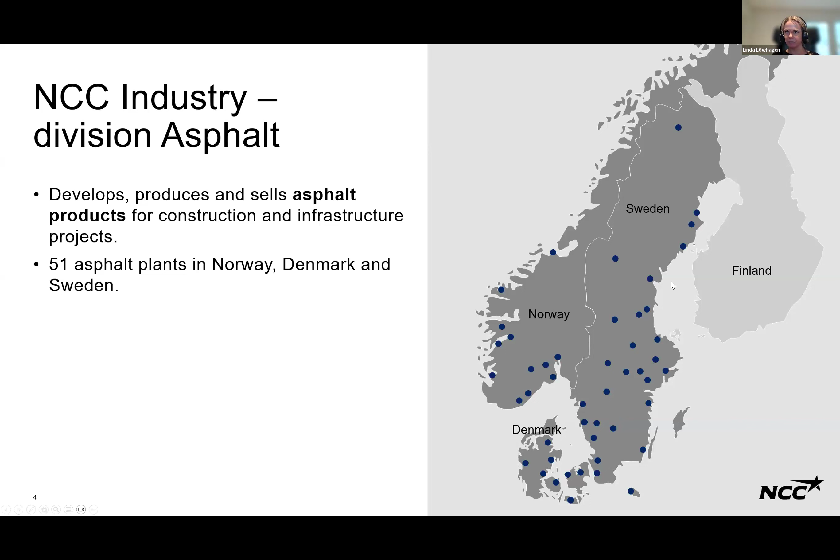So at Division Asphalt, we develop, produce, and sell asphalt products in Sweden, Norway, and Denmark. So here in these countries, we have 51 stationary asphalt plants, and you can see them here as small dots. This is the life cycle of asphalt products, and asphalt consists mainly of crushed stone materials, but also of this product binding agent called bitumen, which is produced from petroleum or crude oil.

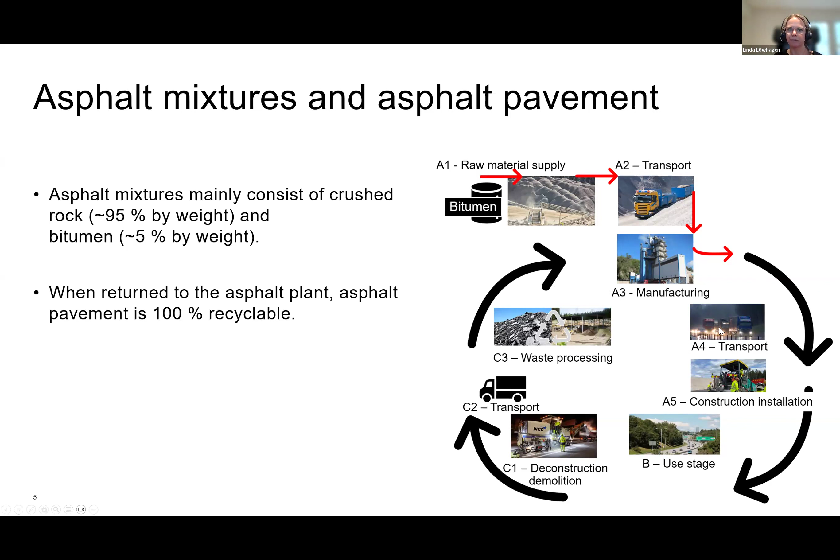And if at the end of the life cycle, you can see the life cycle here in the picture, at the end of waste, if the asphalt pavement is brought back to the asphalt plant, it's recyclable for 100%. So we can recycle all the asphalt pavement that is brought back to us. And asphalt production is super energy intensive. We use a lot of energy. We use 7 liters of diesel per ton asphalt mix that we produce.

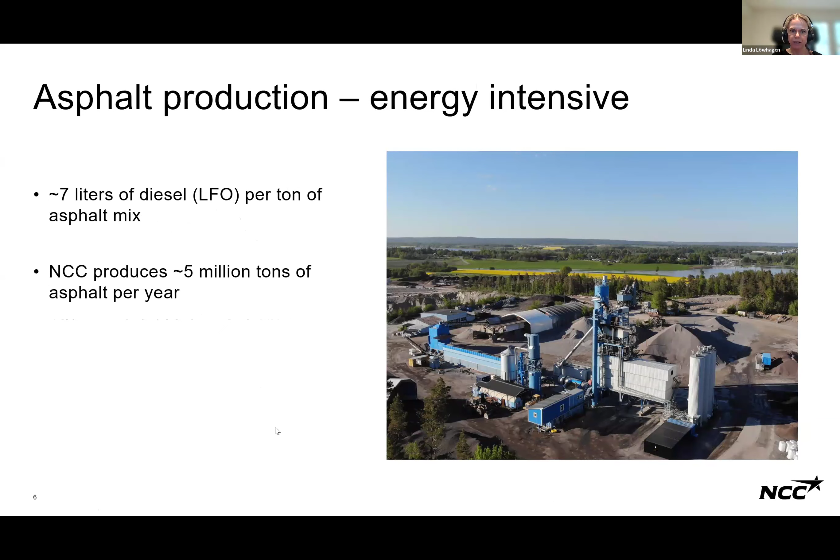And only us at NCC produces around 5 million tons of asphalt per year. This corresponds to 342 gigawatt hours. But I have a problem to understand these figures, so I tried to put them in a context. So this corresponds to 4.6 days production at the Swedish nuclear plant, Forsmark, or driving a Tesla for 163 million kilometers. Or if you want to take the same Tesla, 2,036 round trips to the moon.

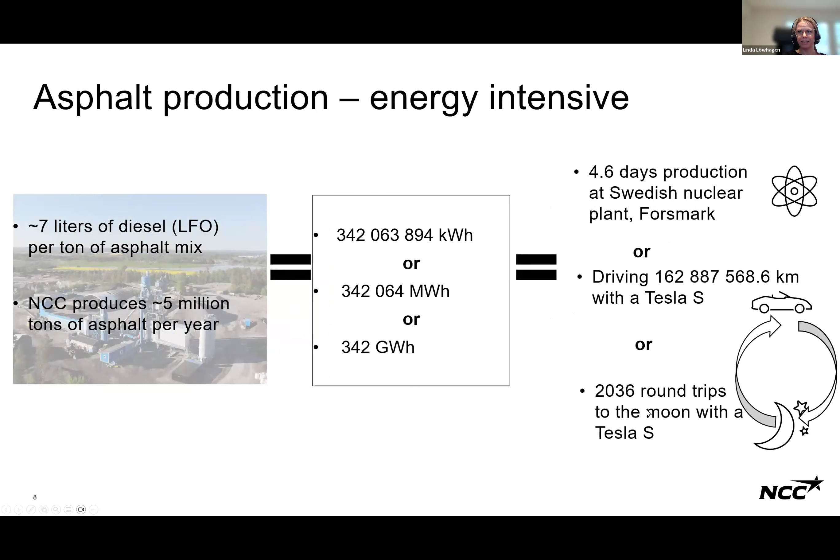Anyway, still hard for me to understand the amount of energy, but I do understand that it costs a lot of money. So in Sweden, we have no taxation on biofuels since 1984. And we also have this special carbon tax on fossil fuels since 1991. This is, of course, a large incentive for us to reduce energy consumption from fossil sources, but also to change for renewable energy alternatives instead.

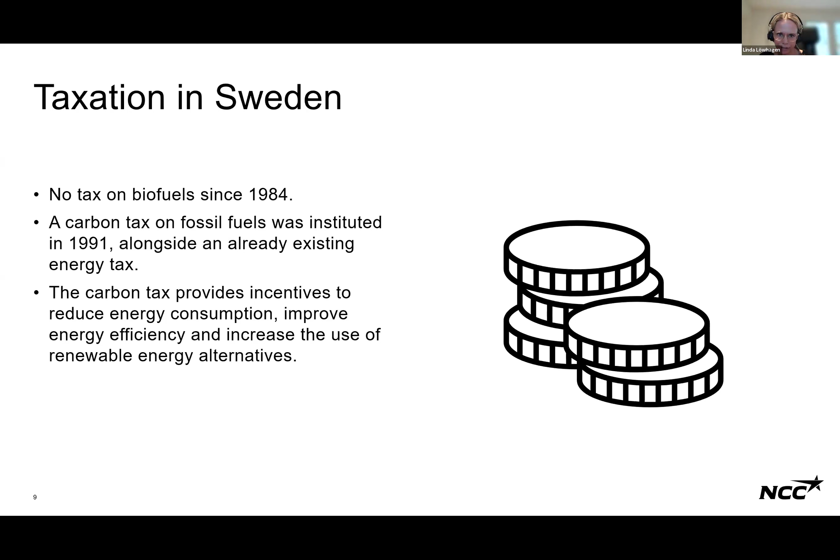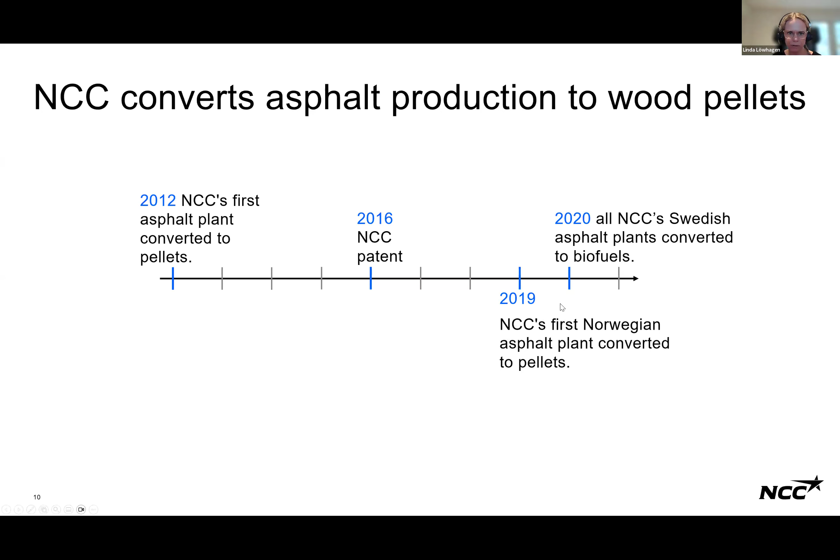And this is one of the reasons why we at NCC started to convert asphalt production to wood pellets. So in 2012, our first asphalt plant was converted to wood pellets. And in 2016, we had worked out this patent for using wood pellets in asphalt production. 2019, our first Norwegian asphalt plant was converted. And in 2020, all our Swedish asphalt plants were already converted to biofuels.

But because of the different taxes and different availability of the fuels, we have traditionally used different fuels in our asphalt production in all our countries. And when we started to convert to wood pellets, we had some major challenges with this. I'll try to explain some of them. Here you can see a schematic picture of an asphalt plant, and you can see the dryer. This is the drying drum, and to reach complete combustion with wood pellets, we had to expand the drying drum and make it larger, longer.

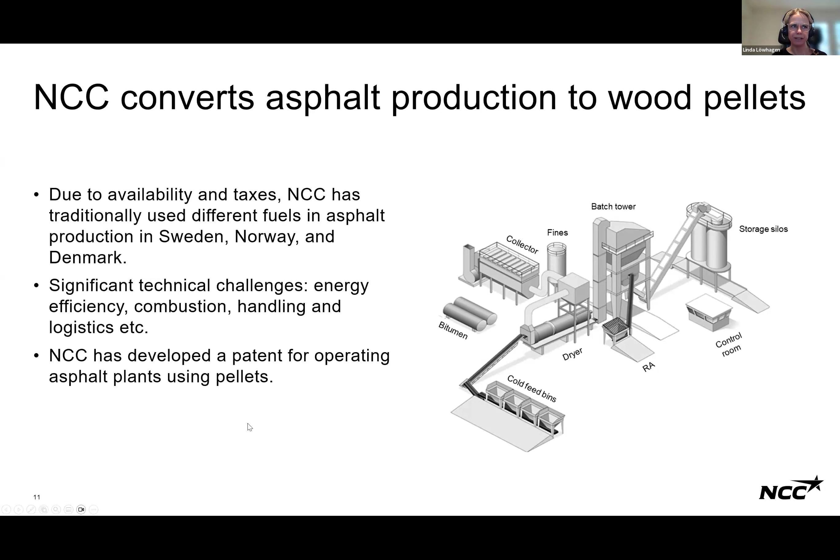Another problem we had is handling and the logistics of the wood pellets, because we can't use it as it is. Of course, we have to mill it into a powder, and then we have these explosion risks and so on. So there were many things that we had to find a solution to. And this is also why we were so happy and proud when we could develop this patent for operating our asphalt plants using wood pellets.

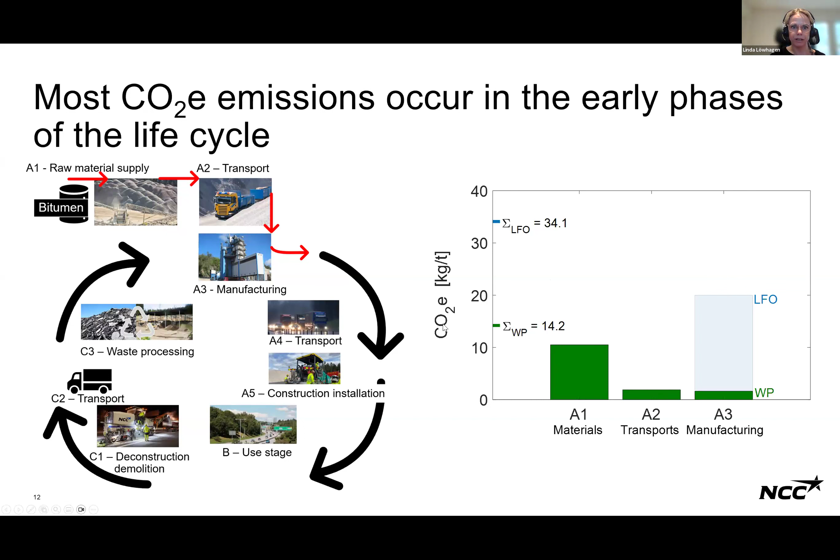If we use fossil fuel, LFO, we have emissions for these three modules of 34 kilograms CO2 equivalents per ton asphalt mix. But if we instead change to wood pellets, WP here in the diagram, we reduce our emissions to 14 kilograms per ton asphalt mixture. So it's a significant reduction changing to biofuel instead.

And we also have requirements on us from, for example, the Swedish Transport Administration. We have reduction requirements on production stage A1 to A3. And to declare our CO2 emissions for these life cycle modules, we are obliged to declare them in an EPD. This is an environmental product declaration. This document is third-party verified, and it presents environmental performance of a product from a life cycle perspective.

And we publish all our EPDs at environdec.com. So you can go in there and find them yourself and see all our CO2 emissions and other emissions from the asphalt plants that we have in Sweden.

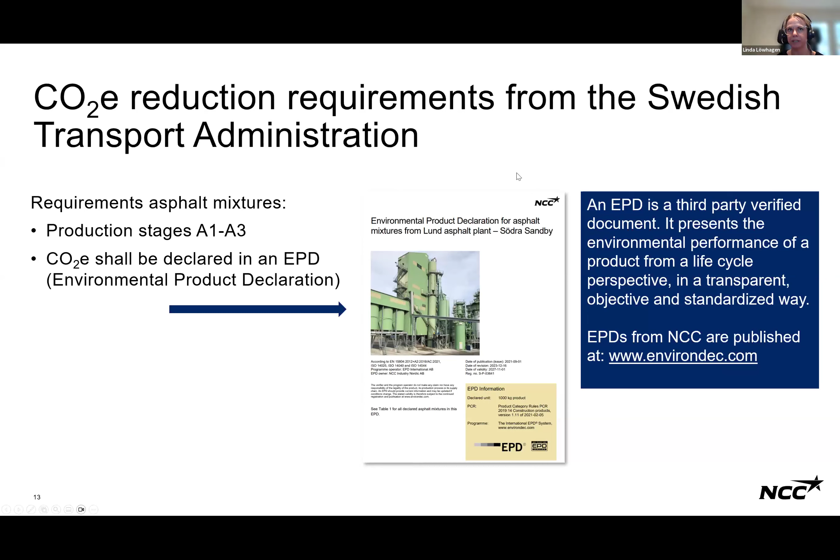As you might remember, I told you that if all the asphalt pavement is brought back to the asphalt plant, we can reuse it into new asphalt mixtures. This initiative, BioBinder, is fairly new, and it's to replace the fossil-based bitumen by a biobinder instead.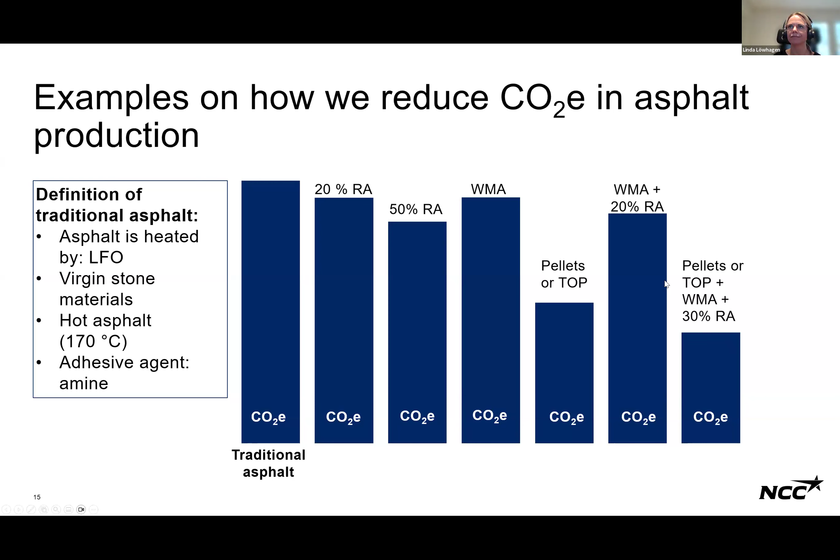TOP is bio oil. You might already be familiar with tall oil pitch. But of course, the most important thing is to combine all these measures to achieve the largest reduction. Here, according to our generic data sets that we use in our EPDs, these are the emissions from each fuel.

The darker blue bars here are the fossil fuels, whereas the lighter blues are the biofuels. And of course, we don't calculate the combustion of the biofuels, since there is an uptake from nature, but these emissions are because of the production of the fuels. So here we can see that there are still some things that can be done to reduce the CO2 emissions from here.

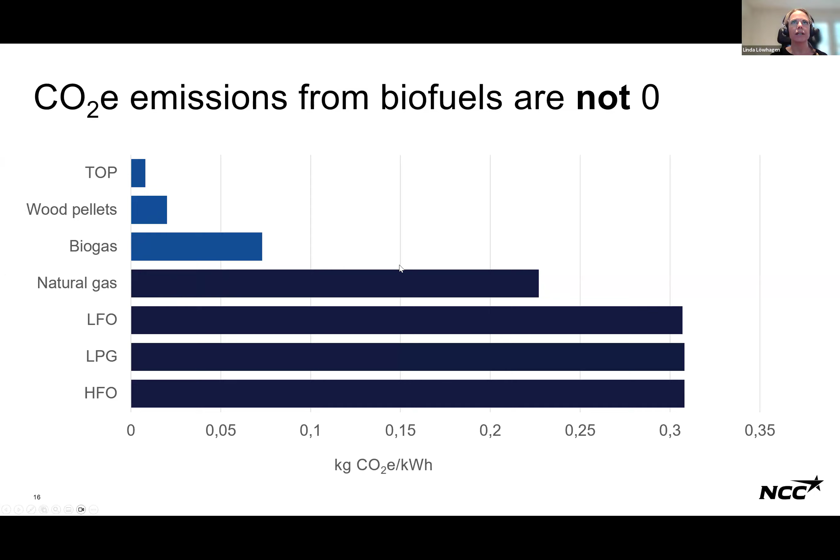So to sum up, the primary measure that we have to reduce our CO2 emissions from asphalt production is to convert to a biofuel. In Sweden, we have already converted all our asphalt plants. So that's good. But now for 2024, the target is that 95% of the energy in asphalt production should come from a biofuel. This can be compared with 2015, when the proportion of biofuels was only 53%.

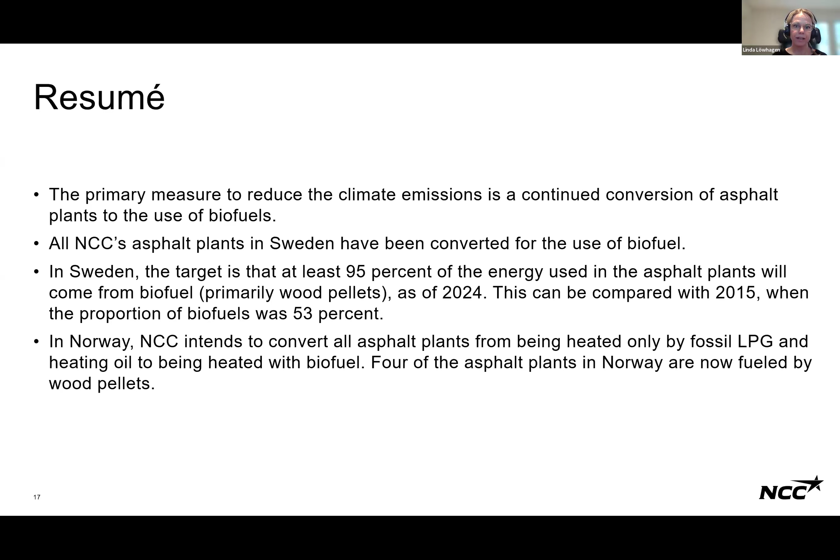And in Norway, we intend to convert all our asphalt plants. And today, we have already converted 4 of them. Yeah, that's it.

Thank you so much, Linda. Beautiful presentation, and I feel a very impressive picture of a company that is taking decarbonization seriously. So congratulations on your achievements.

And I think today's presentations gave a very lively picture of how diverse the possible applications are, even though I should say our examples were pretty much Eurocentric. And apologies for that, because indeed, in other countries, there are other resources. There are countries where there is not such an abundance of wood as in Northern Europe, where the whole countryside is covered with forests. And in these countries, other biomass can play an important role.

So I think what we eventually need to also include is where biomass from other residues than forestry residues, processing residues or recycled wood can be used in order to supply industries with sustainable fuel. I think what we also learned is that things are more complicated than people think. Thomas made that very clear. Doing these projects is a complex business. It's very important to have specialized operators to really realize these.